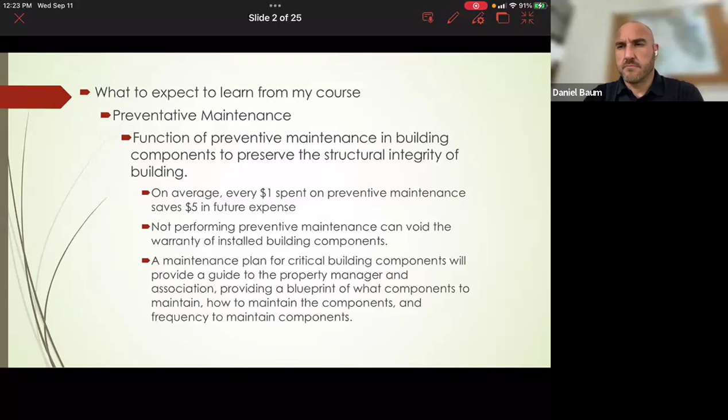Basically what to expect in regards to building restoration: critical components as outlined in SB 154, such as waterproofing and roofing, need to be efficiently assessed, as failure of these components can significantly contribute to accelerated deterioration of the primary members. When you have water infiltration into the building, that's when material deterioration escalates. Champlain Towers, the famous building we're doing all this new legislation for, the waterproofing system failed, and that's one of the reasons we had such excessive deterioration that caused much accelerated failure of the building. So the waterproofing system is very important.

For your catwalks and balconies, you want to recoat your balconies every 5 years on average, and replace your waterproofing every 15 years.

It's basically to assess the building in respect to life safety of the residents. As an engineer, the primary goal for us is to not give people a hard time. We're not out there trying to give people a hard time, saying hey, you got to come up with 10 million dollars for your building. We're here to provide life safety first. At least that should be the goal.

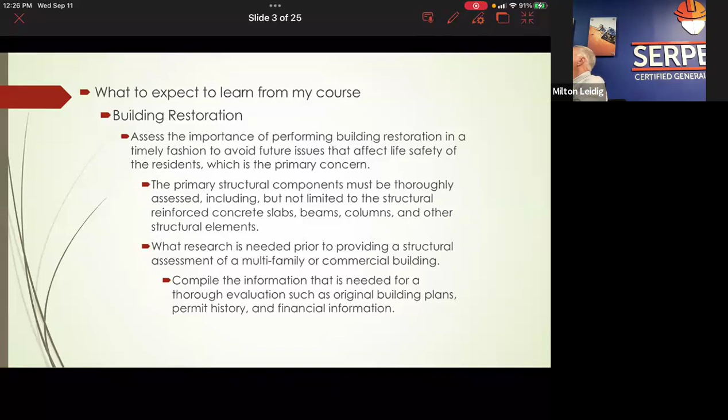The definition of preventive maintenance is basically regular planned maintenance based on time-based triggers. These could be based upon usage hours, like machine hours for a generator, or based on anything. Take the roofing system, I keep mentioning roofing because that's a big thing, it serves many different functions. Even at the top floor of a building, insulation can keep the building cooler, and there are different types of insulation and roofing systems that could keep the building cooler.

It's important to hire the right professional consultant to maintain the respective building systems, such as fire protection. Although cooling towers are not, quote unquote, considered a critical building item as defined by SB 154, it is very critical to maintain your cooling towers, as not having air conditioning could be brutal, especially here in Florida. If you have a newborn child or things like that, you want to make sure you're ahead of the game. Once your cooling towers malfunction or break down, you're without AC, it's not comfortable, and you have bigger issues that could've been prevented if you properly maintained it.

You want to be diligent in performing preventive maintenance, even having a preventive maintenance plan, which is the whole goal. You want a plan that could be clearly followed, and ensure to keep attic stock of replacement parts. If you get something installed, say an emergency generator, you want to get all the parts that can be replaced. Look at the double detector backflow preventer, you want to have the O-rings.

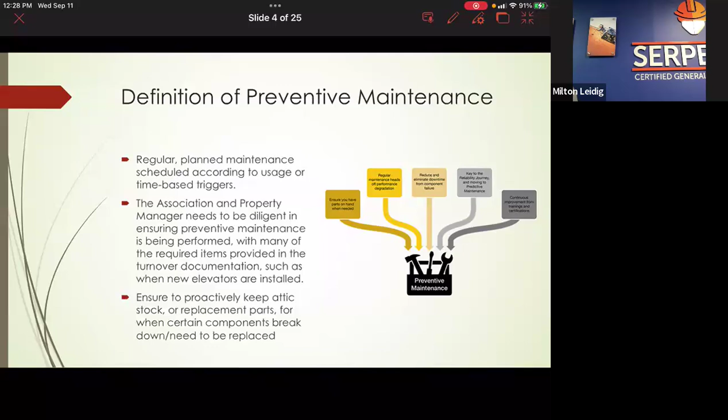So basically, getting into roofing again, even the best systems require diligent maintenance. You want to look at all the components and the condition. There are different causes and effects.

It could be that they didn't adhere the material properly. There could be moisture trapped in that gets accelerated by sun exposure. That would cause blisters, and you can also get alligator cracking.

You want to remove the excess material and repatch it. There are different ways to maintain and provide maintenance, which could include trimming excess material, readhering felt reinforced material, and installing heavy layers of opaque gravel to help prevent these issues from occurring in the future.

And of course, there are different roofing systems, and right now I'm talking about a built-up modified roofing system. In one of the pictures, you can see the granules from the cap ply accumulating in the corner of the building, and over time it just keeps building up and up.

This could cause issues like clogging the drains. So something as simple as cleaning it out, clearing the trash, and looking at the seams matters, because water is going to want to penetrate through the seams.

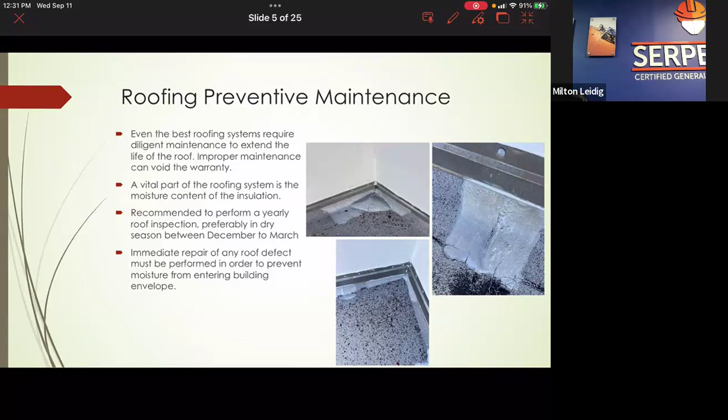Going into plumbing, which I believe is a critical item not properly addressed — in the bathrooms and kitchens you have these sanitary stacks, typically made of cast iron piping. Cast iron piping is very useful because it's stronger, but it corrodes.

There are many advantages to having cast iron piping. It's more durable, it's fire resistant, which is applicable for these different types of buildings, especially if we have fire rating requirements between units and walls. It's more cost effective, it reduces heat transfer for fire resistance, and it reduces sound — nobody wants to live in a high rise and hear a toilet flush all day.

So you want to look at the plumbing — it's a critical item in SB 154. After 25 years, the piping could corrode, split, crack, or have other issues. And then what do you have after that? Basically, a sanitary biohazard.

Say a pipe breaks — what do you have to do? You have to rip up the floor, rip up the wall, and do all these different things to access the pipe and replace it. So you want to avoid this. You want to get the plumbing inspected, especially after 25 years and especially in a coastal environment — camera inspect your pipes. Even after 50 years, if the board tells you they've had the plumbing pipes inspected, you still want to inspect it again.

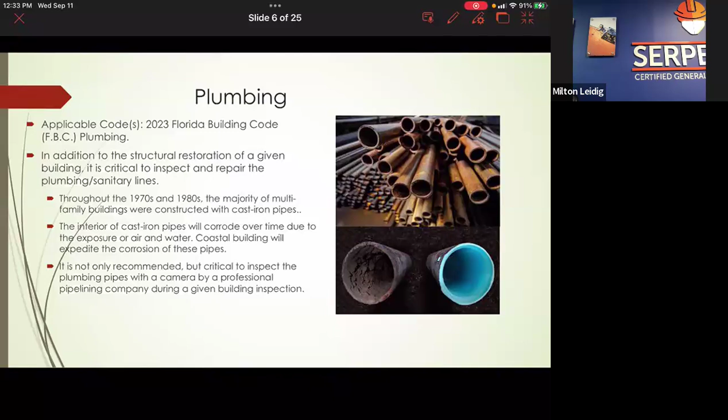There's different types of inspections I'll get into on the next couple slides that will really show you why you want to do these different types of inspections.

There's something called rehabilitation, specifically cured-in-place piping. Basically, it's putting in an epoxy liner down the inside of a cast iron pipe. With the inverse installation, inside out, you roll the material down with epoxy, and when it hardens it sticks like glue to the sides of the pipe. You can hit it with a hammer and it's so hard it cannot be penetrated, so it's a very durable system. Then you use a robot to cut out the holes for the Ys going into the units.

This is a more effective way to address plumbing as opposed to replacing the pipes when something fails, because when something fails you have not just the cost but more issues. Even with other systems, like gapping, you have issues where you don't get the adherence you should have. You want to do the whole pipe completely instead of small different sections.

This is really why we do these different types of inspections. When you do these milestone inspections, the SIRS, you want to camera the pipes if they're at least 25 years old, even if it's been done before, because you really want to see what you have—it could be a ticking time bomb. The structural components of the building are like the bones of a human, and the sanitary lines are the arteries. So if you have an issue with your arteries, you're going to have problems.

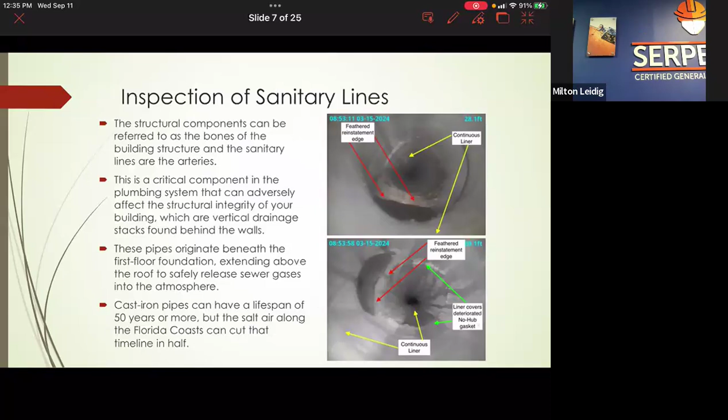Here are samples of the inside of pipes using the gapping method, where basically the same process is used but holes are cut out before putting in the liner at the Ys and Ts. So the T and Y area is still in the same condition, and at the location where it meets that junction, at the Y, it doesn't properly adhere. It can't, because there's no way—you're using scissors or something to cut out the pieces to put in there—and eventually water is going to start getting behind it, and then you're going to have future issues.

So this is something I think should be more concentrated on when we're doing inspections, because for plumbing we want to look at the backflow preventer, any stains, any dripping, any fasteners or fittings that are leaking, anything like that. But one of the primary things that should really be looked at are the sanitary pipes.

The backflow preventer is a critical item because it provides domestic water as well as fire sprinkler water into the building for the fire protection systems. The double detector check valve, if it fails, it's costly—even just replacing it is costly, because of what you're tying into.

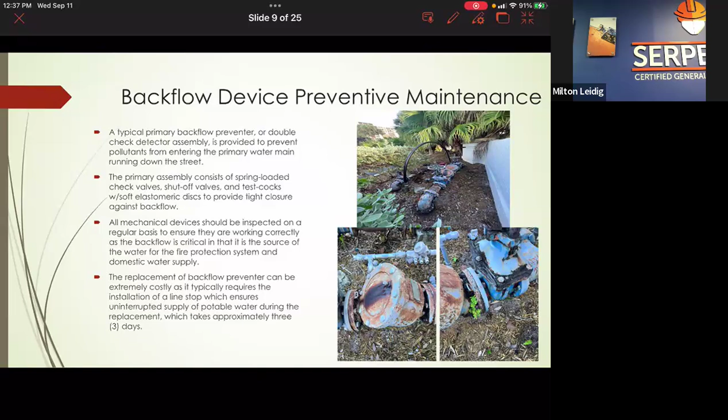All right, so the fire protection systems. This is very critical for the building, life-saving. You want to make sure that you look at any red tags for your inspections. If there's any red tags, you want to address them immediately, and take care of any issues with your fire protection system right away.

Fire protection piping is always energized, right? You always have to have water inside the pipe, and you always have that pressure, so you have constant head pressure within your pipes. Without the minimum water pressure, you can't have the required water supply you need to put out fires. They won't have enough output.

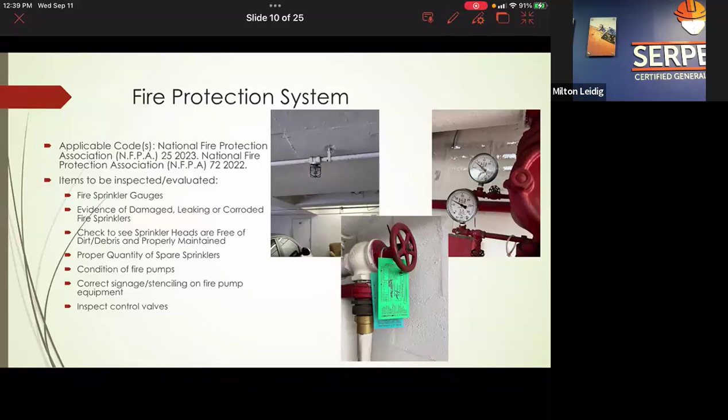So you want to check the flanges and the bolts. Due to the pressure, if you have any weak points in the system, especially the main fire riser, and the bolts are so corroded that they fail and the pipe breaks, you're going to have an issue, you're going to flood your building. Careful things like getting the system shut down, replacing the flanges, bolts, and gate valves could avoid this.

I've seen many times, even recently, where a building would say, hey, casually, yeah, our building flooded or our garage flooded because our fire sprinkler line just broke. I'm like, oh, that's great.

So you want to take care of this because it's going to be very, very costly. That's the whole idea of this webinar, is to spend the money to take care of the system before you have a failure. You really want to carefully inspect the whole system completely, and make sure you have your inspections once a year.

Chris, this is Daniel, we have a question from the previous slide I'd like to address. The question is, what do you do with cast iron pipe if it's damaged under the foundation? We've been told that a camera cannot see if it would be able to be lined, and that it could damage the pipe as a liner is being placed. I guess what they're saying is putting in a liner could actually damage the pipe further as it's being placed. Would it have to be replaced anyway? What do you do with the foundational situation where they're told the camera can't see down there, or that the liner may cause additional damage?

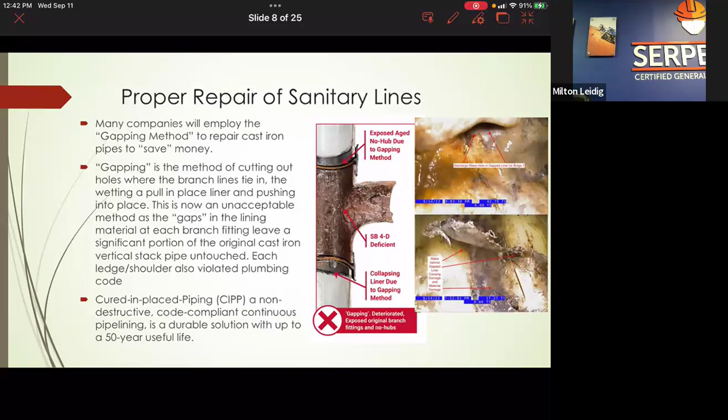And it is true that sometimes you will have to replace piping. You might have to demo the slab, the foundation, the concrete, just to dig down and access the pipe, and it could get costly. That's why the whole idea is getting one step ahead, maybe start looking at your pipes after your building turns 25 years old. But that's not always the case, sometimes you inherit buildings that are older. So the second opinion point is good, but it's more case-by-case.

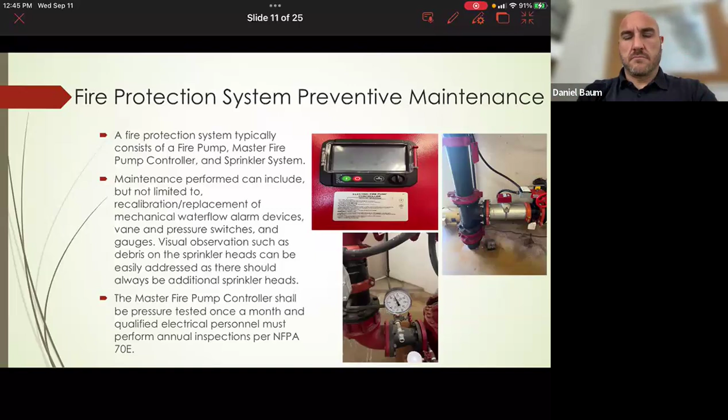It's a pretty elaborate system that can be maintained with the proper maintenance package and proper personnel. You want to have a professional fire protection company inspector on board to do this, and of course the fire marshal doing their inspection, which should happen once a year. Just work with them. These people don't want to give you a hard time, at least most of them don't. They really want to make sure your building is safe.

Waterproofing and painting. As I mentioned before, waterproofing is a very critical issue when it comes to buildings. You want to recoat your balconies and catwalks every 5 years, and replace every 15 years on average. Some people just wait until they're forced to do it. It really depends on the building, but you want to keep up to date and take care of this. Painting is typically performed every 5 to 10 years, and cost per painting could rely on the existing condition, quality of paints, and accessibility.

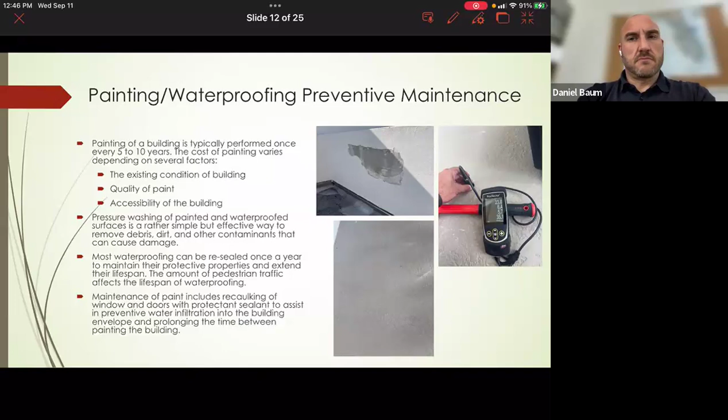Ways to do preventive maintenance are simple things. You could pressure wash your building to remove deleterious material, dirt, and debris off the side of the building. Take care of your building, re-caulk the windows. If there's any alligator cracking, look around the windowsills, door frames, and everywhere water can enter, like around the fenestrations, windows, and doors. Look for any cracks, peeling, blistering, anything obvious.

You could address it by resealing your waterproofing or redoing the caulking. There are a lot of different ways to maintain the painting and waterproofing on your building so it lasts even longer, so you could wait 10 years to paint. It's very critical to keep your building watertight, as moisture penetrating the building could affect the structural components. Once it gets into the building, you have much greater issues that could cause bigger problems in the future, so it's best to prevent it at the beginning.

Getting into cooling towers, you want to have not only a preventive maintenance plan but an effective water management plan as well, because there's a lot of deleterious, harmful material in the water generated by circulating it. The cooling tower provides cool water to the units inside the apartments, then recirculates it and brings hot water back into the cooling tower system. If it keeps recirculating, you could have buildup, even though there are advanced systems that prevent this.

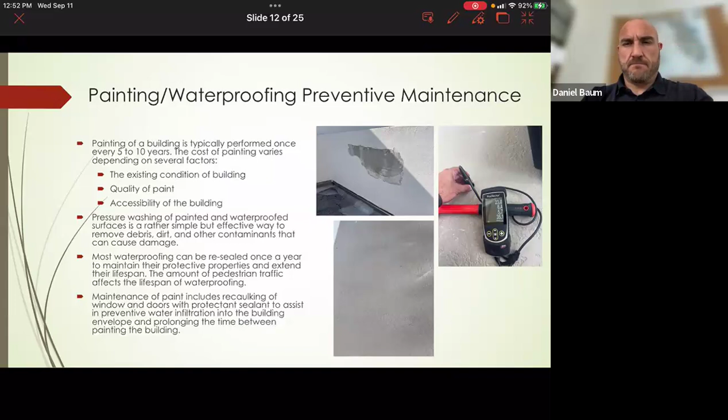We had another question come in for a recommendation on a water treatment professional, back on the cooling tower preventative maintenance. Perhaps you can recommend someone in the chat at the end of our webinar. Yes, sure, I could definitely do that.

Thank you, Daniel. Okay, so going into emergency generators, they are critical, even though they're quote unquote mechanical, and mechanical systems are not part of SB 154 components. This can matter if you have a unit owner who has health issues or medical issues and is on some type of medical equipment that needs to be powered on.

I don't know, specific situations, someone with liver or kidney issues that needs medical treatment at their house, and if a storm comes and their power goes out - that's one example. If you have a newborn baby, just different things you have to have power for. You want a working refrigerator, working AC at all times and power. Obviously in hospitals that's a given, but even in multifamily, condos, and apartment buildings too.

So basically you want to be able to continuously check the oil levels and coolant levels. It's not more about time, it's more about hours of operation - the hours of operation really indicates how often you should do these different things. So replacing all these different parts, looking for leaks, checking the manifold, spark plugs if necessary, the motor oil, checking for loose wires or loose connections, just making sure you properly maintain your emergency generator.

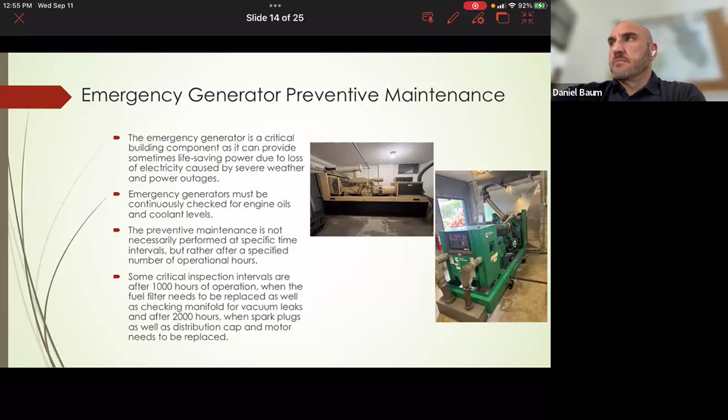All right, trash chutes - people don't really think of trash chutes as critical, but it can lead to fires. You have people shoving pizza boxes in there, or other people who don't care, or you just don't maintain it, don't clean it.

So basically once a year, every year, you want to clean the quote unquote goo off the sides, break it down. Per code, you have to have a water supply at the very top of the trash chute to clean it out, which also doubles as a fire protection system if any fire breaks out inside the trash chute. And inside the trash room, you have to have a fire sprinkler both at the top of the trash chute and in the trash room.

So you want to have both places - you want your fire protection system here, you want to clean it. You don't want infestation of bugs, you don't want any other issues that come from not properly caring for your trash chute. I know it's a simple thing, but this also can be treated as well. So as I said, infestation, fires - you want to basically keep an eye on your trash chute system and replace anything as necessary. Typically I say these last about 60 years, maintained every year.

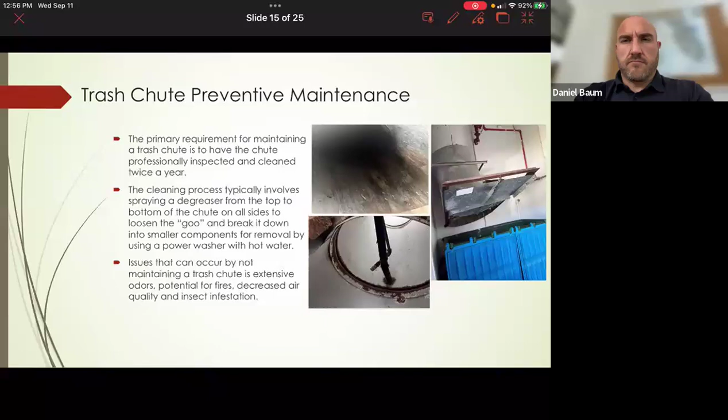Okay, so getting into elevators, what you want to do in these inspections is look at all these elevator pits. I've seen elevator pits where you look in there and the hydraulic oil is just kicked over, so there's oil all over the floor. And it's like, really? First, in most maintenance plans, they should be coming out every month, refilling these buckets, looking at everything.

So these are more for smaller, like 3-story to 7-story buildings, because they work off a piston and usually can't get up higher than that. The hydraulic fluid pretty much just powers the piston to make the elevator work, so it only goes up - say you're limited at basically 60 feet. And then there are advantages too, to both systems - traction elevator is more efficient, is faster.

So there's different reasons why people use both these different types of elevators. Basically, looking here, making sure there's a ladder - very simple. You look in, sometimes there's no ladder. How are you going to access this if something happens, a breakdown, and you're going to jump in there? Look at whether there's proper lighting. Just look at these different things that could be an issue.

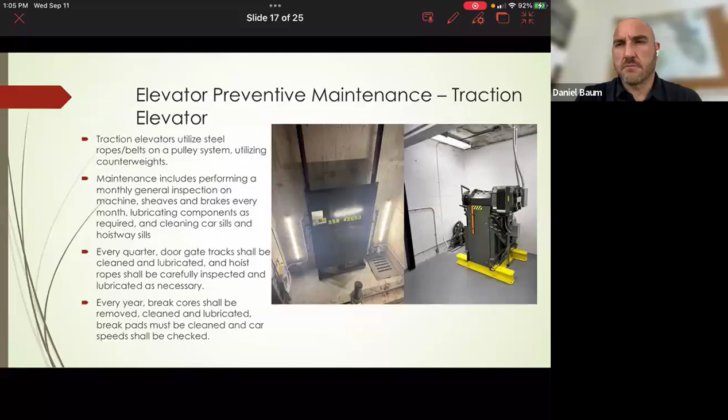So you really want to put this type of waterproofing - let's see if I have it, you kind of see it in this picture here. It really has to do with this waterproofing you're surrounded with. But if it's flooding, then you might have some bigger issues that you really need to assess pretty quickly. There's something called Xypex - it's a crystalline waterproofing system that creates negative pressure that pushes the water back and doesn't allow it to penetrate into the pit. That's typically what's used for these elevator pits.

Oil water separator, I don't know - you really have to have someone take a look at the actual situation, what's going on, because sometimes you don't really know, and you have to do further investigation to see what the actual real issue is and what the corrective solution is. So it's really hard to say on the spot.

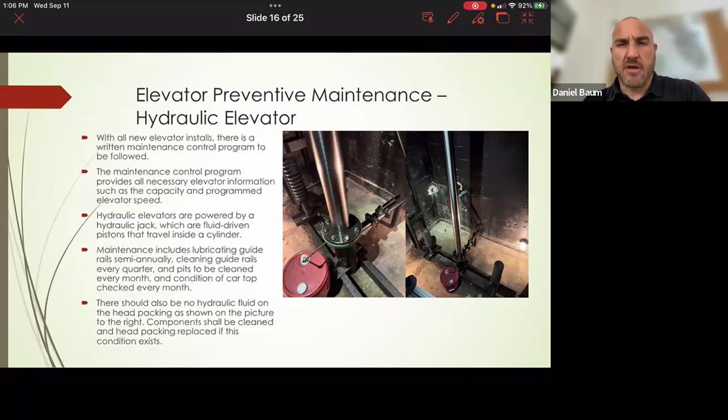Bear with me one sec, Chris. Let me just see if this last question that came in has to do with elevators. Nope, okay, please continue. All right, thank you.

So getting really into building restoration - I believe that restoration should be done every 8 years, especially in coastal environments when you have chloride ions. I'm sure you've heard this many hundred times - getting into the concrete further accelerates the concrete deterioration. So basically there's different ways. When you repair concrete, there's something called FerroGuard 903 - it's an impregnator, it helps impregnate the concrete, and then it further helps stop deterioration and the corrosion of the reinforcement bar.

So there's different ways to help stop the corrosion - it's all about money, it's all about spending the extra funds to properly repair everything. So you want to do the proper repairs over time. You look at these steel columns - they're so deteriorated and so bad that a lot of them have column covers on them.

A lot of people just keep wanting to paint them, so you paint them until you can't paint them anymore, then you have to replace them. Sometimes you do repairs on columns that actually need to be replaced, so you really need to assess it. If there's column covers on a building, you want to have them removed when you do the actual inspection. You really want to get deep down into the issues - you don't want to listen if a building tells you, can you go ahead and sign off on our building as being okay?

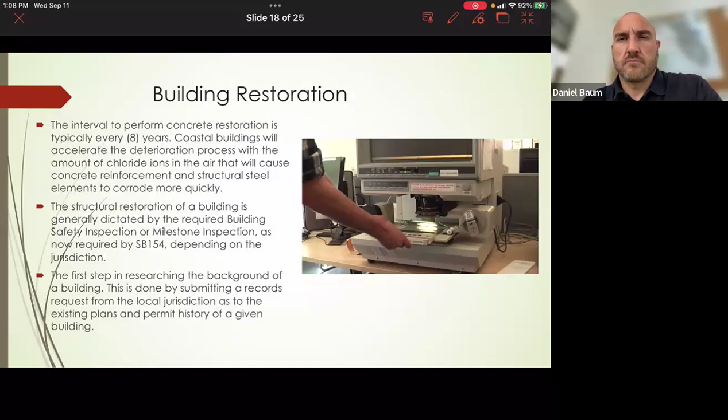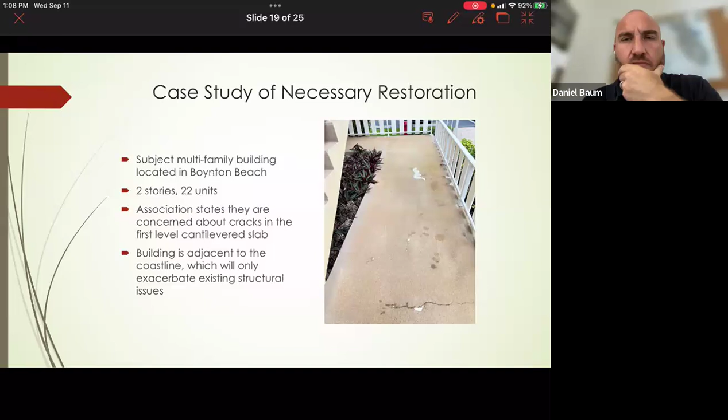So this is one, for instance, there's one in Boynton Beach. Two stories, 22 units. They basically said they had cracks in their first level cantilever catwalks. So I'm like, oh, you have some cracks. They were concerned. They're like, okay, let's look at this. It was on the coastline.

Then I took a robot and inspected underneath, and I'm like, hey, you have issues, structural issues, you've got to fix this. If it gets worse, some poor old lady could break her leg or worse. Eventually the slab's going to give out, the corrosion's going to spread, it's going to keep going full depth.

They don't want to hear it. They're like, we don't have the money, we don't have the funds. And I'm sure a lot of people say that, but when something happens, it's going to cost them 10 times more in lawsuits. You can't force somebody to do repairs. You can't force anybody to do what's needed. I don't have puppeteer strings to be like, hey, do this. If they don't want to do it, they're not going to do it. There's really nothing you can do.

You just really don't want to get involved in situations like that. But as me, I want to tell people how it is. This is the situation, this is what you actually have going on. So that's the whole idea.

Yeah, and I think that's a fantastic example, Chris, of a situation that people might think is a minor issue, just having some simple cracking on the sidewalk, only to find out there's actually a major structural issue underneath. And when you talk about budgeting, when those first cracks start to show in that concrete, having an expert come in and take a look, you could solve that fairly easily with some concrete restoration fairly quickly. Or, in the worst case scenario, you let it go and let it go, and then you have a major catastrophe that will cost significantly more money to repair, plus the potential lawsuits.

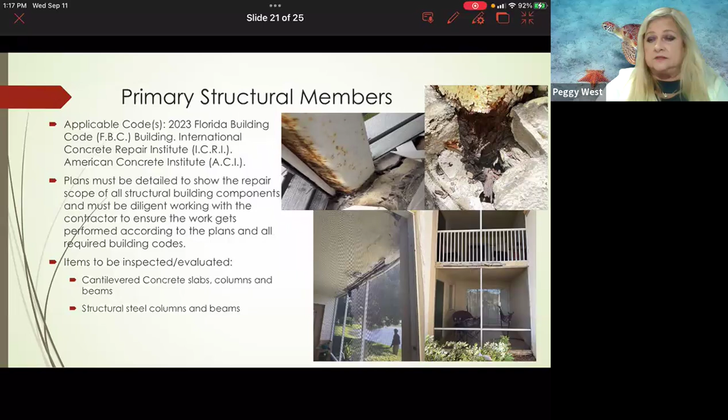I do know a lot of vendors just from networking. That's all. Okay, thank you guys.

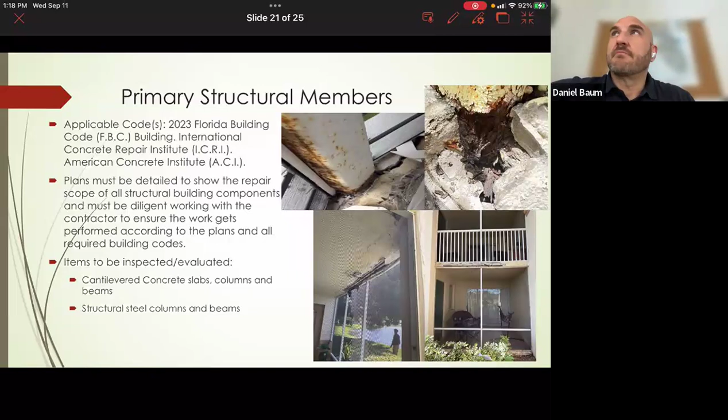Thank you guys. The only thing I'll say about this slide—structural deterioration, structural repairs, Surfside, all these things have been talked to death—but just the condition of these buildings, how they get, people don't realize they're living like this. Like this one on the bottom left, the community in West Palm Beach. They have 23 three-story buildings, and all of them are like this. But they say, we want to fix this building and that building, but not that one yet. I don't know what to tell people sometimes. But these get to pretty rough shape, and you don't want to wait till it gets to this point.

I would also add, Chris, from an insurance standpoint—pretty much every policy I've written this year for new property coverage, when the inspector goes out, that's a big red flag on the rec letters. Where they find those panels, they're starting to ask communities to replace them completely or get dropped from their property insurance. So if you know you have outdated panels, especially these types Chris is referring to, you should already be budgeting to replace them, or you risk having your property insurance terminated. Thank you, Daniel.

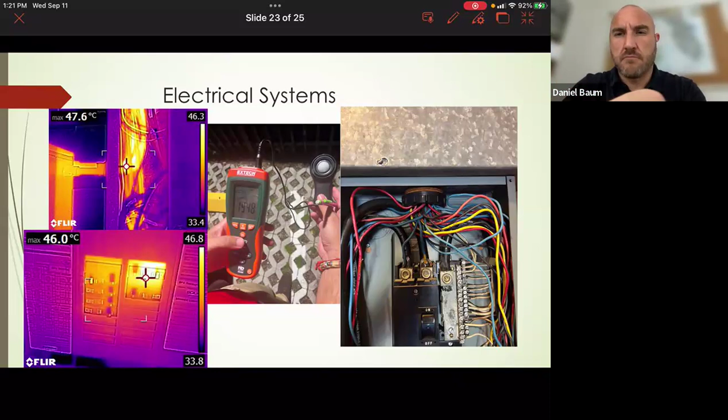There are other items you could do, like splicing—splice in a new breaker, different circuit breakers, things like that. But the main things to look for are arcing, any frayed plastic, frayed wire, overheating wire, like the ones on the left—those were pulling pool pump equipment and were incredibly hot, so we replaced those panels. In the middle is just a standard light meter to test the luminescence in a parking lot. So these are different things to look out for in electrical systems.

I'd like to send out this presentation to everybody if they'd like, if you request it or if I'm allowed to. And that's it—just basically get your engineer or reserve study provider to provide you with a preventive maintenance plan. That's it, just one last thing.